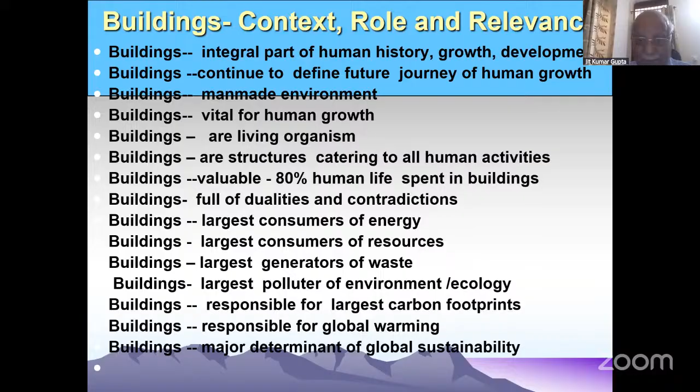So therefore, buildings are relevant, and buildings carry a message for you, that they have to be good and supportive of human living. So if buildings have positivity, buildings also have negativity. The reason is buildings are the largest consumer of energy and resources, and the largest generator of waste. And they are a prime reason for global warming and environmental and ecological damage. So once you know buildings have positivity and they have negativity, that's where we have to ensure buildings are made rational—they are planned and designed in such a manner that they not only help humanity, but also preserve nature and biodiversity.

So buildings have their own connotation, and studies have already shown that a green school makes learning much easier and much more meaningful. A green house makes people happy, healthy, and more productive. A green hospital cares for patients very quickly, and a green shopping mall increases sales. In fact, please understand, sustainable buildings create a win-win situation for the owner, occupant, and user. And the context of the building, you can see, is the human being, because human beings require everything for their education, healthcare, study, stay, and work, etc. So as human numbers increase, the demand for buildings is also growing.

With rapid urbanization, more and more people are opting for cities and migrating to cities where new kinds of buildings are there. So the context of building is going to be relevant, and more and more buildings will be constructed, and the building typology will go on changing.

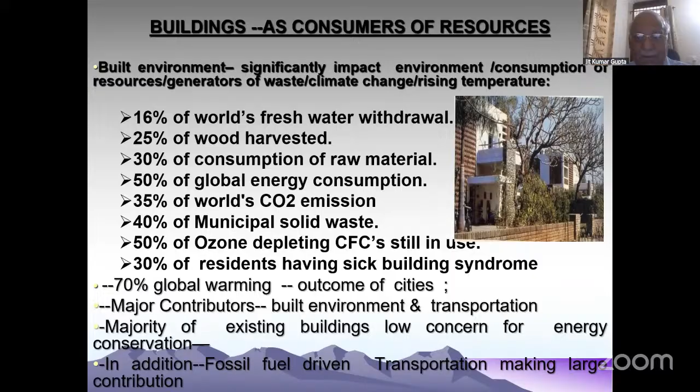So buildings have role and relevance in water, energy, material, waste, carbon, and also in making people happy and healthy. It's important to understand that buildings have to be looked at more attentively, more rationally, so that you do a good job, because the role and responsibility of architects remain very critical.

Because if you design a bad building, that building is going to do great injustice, not only to humanity, but also to the environment.

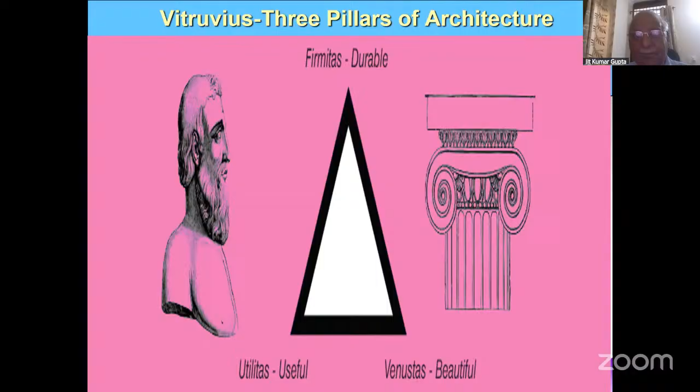Just look at this gentleman, Vitruvius, the father of architecture. He was chief engineer in Rome, and he was the first person to lay down 3 principles for any building. He said a building must comply with 3 things. Number 1, building must be useful. Number 2, building must be safe to live in, and durable. And thirdly, the building must be beautiful - utilitas, firmitas, venustas. These were the three principles enunciated by the father of architecture.

But I found out it is not only these three - beauty, utility, and safety - because building involves cost, quality, and time, you are spending money. And in addition, buildings are not only these six factors, buildings are also consuming resources, and buildings are also impacting biodiversity and environment. So these nine parameters are cost, quality, and time, utility, beauty and durability, plus conservation of resources, biodiversity, and environment.

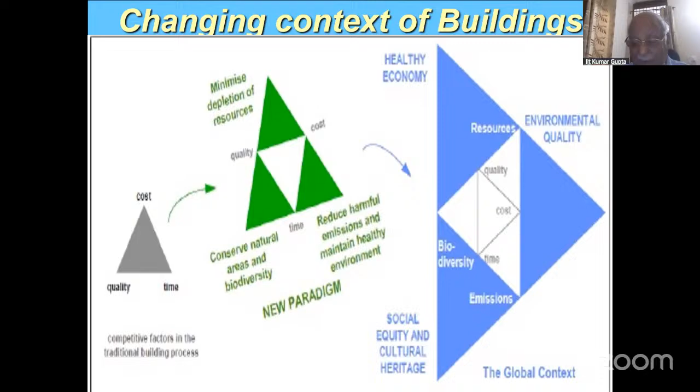Plus, buildings have the local and the global context. Don't think that if you do a wrong building in India, it will only impact locally - it will impact the environment globally. Or if you do a good job, then it is going to positively impact globally. So the buildings are not only having the local context, they have the global context too.

If you dissect the building, a building has 7 layers across its entire life cycle. First, you look at the site, then you get into the design, you construct it. Once the building is constructed, you occupy it, you start operating it, and during operation you maintain it and renovate it. After the building has outlived its life, or you want a new building to come in, you deconstruct the building and then do this again.

All these 7 layers basically involve consumption of energy, water, material, and natural resources all the time. And what does it do in the process? It generates waste, pollutes air, water, and indoor air, creates heat island, and leads to flooding and noise. The cumulative effect of all these factors is harm to human health, environmental degradation, and loss of resources.

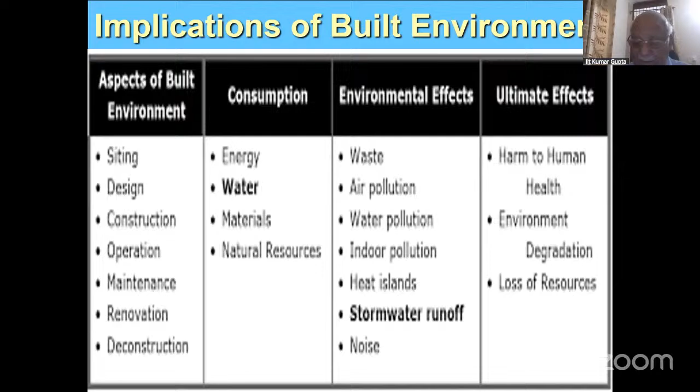So you can see the positivity and negativity of building, and it has been categorically said that buildings have to be looked at very carefully, because buildings are known to generate carbon dioxide to the extent of 10 gigatons. 35% of global carbon dioxide emissions can be attributed to buildings. Water, energy, waste - I mentioned all these. In India, studies by McKinsey Global Institute say India needs 700 to 900 million square meters of built-up space annually.

So we know buildings have impact on human health. They are impacting environment, ecology, and resources itself. So therefore, if we have to remain sustainable, building needs to be looked at critically, differently, distinctly, and we need to appreciate the role and relevance of the building - they need to be planned and designed differently. As professionals, you all know there are options available with us to make buildings more resource-efficient, supportive of the environment, and least consumer of energy and resources.

But what option could be? You approach and look at the building holistically as one unit. So you have an integrated approach to planning and designing the building. Secondly, you have to design your building with response to the climate where the building is located. Another option is to work with nature, because nature provides all kinds of solutions and resources, and the resources provided by nature are all renewable and never exhausting.

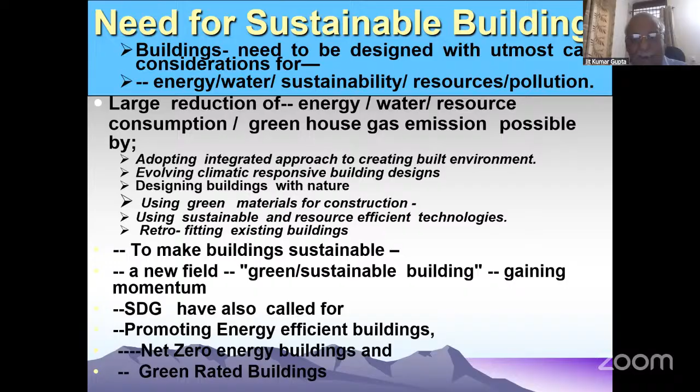So therefore, in order to achieve buildings that consume less resources, water, energy, generate less waste, and provide the best indoor air quality, we have to look at buildings differently and distinctly. We have to plan buildings in a different fashion, and the new typology of building that is coming is green and sustainable building. That's what we are looking at.

And this can happen only... there are two things: cities are consuming 70% of energy and 70% of resources, and this we have to minimize. There are two areas which are consuming major resources and generating waste - number one is the building, and the second is where you are traveling.

So if you make your building sustainable, least consumer of energy and resources, and if you can minimize travel, and shift people traveling from fossil fuel-driven to electrical or other sustainable fuels, you will do a great job.

So after we have done our job, and we look at green buildings as the option, let's understand what green buildings are. When you look at green buildings, please understand there are 5 elements which constitute a green building. Wherever the sustainable building and green building issue comes, these 5 principles will form the underlying foundation for designing this concept.

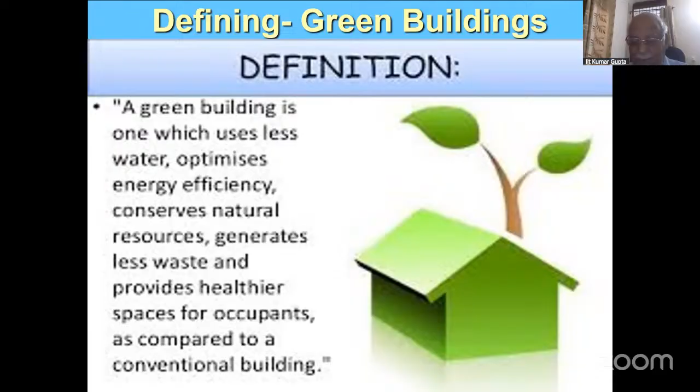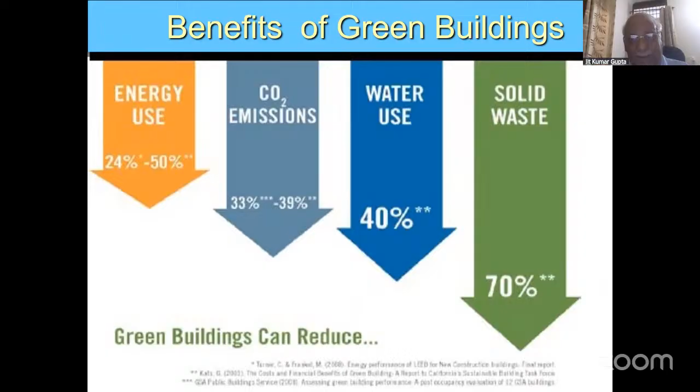So a green building, when you design it on the 5 principles, you will be able to reduce energy consumption up to 50%, water by 40%, carbon emission by one-third, and solid waste by 70%.

Now the benefits of green buildings: since buildings last 60 or 70 years, every day when a building is in operation, it costs money. From the day you start constructing, involving energy, water resources, etc. So if you want the building to be cost effective, with reduced operation costs for water and energy bills, and minimum maintenance costs, then you go for a green building.

In addition to reducing operation cost, green buildings add value because you fetch more rental due to minimum operation cost. You attract multinational companies coming into India, because they first check whether the building is a green building, knowing there's a lot of money involved in electricity and water bills. In addition, it increases the asset value.

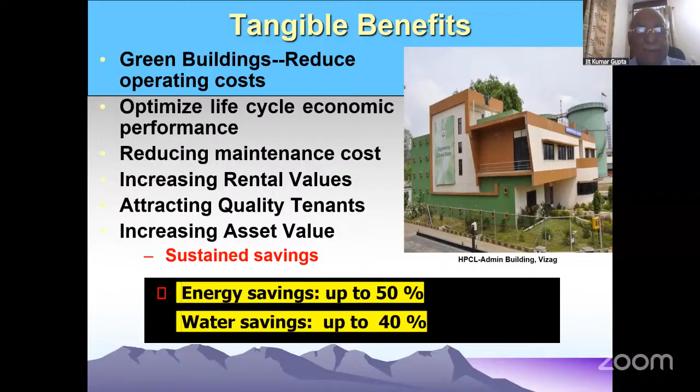In addition to these tangible benefits, there are intangible benefits because you are reducing impact on environment, using less resources, and depending more on natural and renewable sources. So you are not destroying flora and fauna, and you are minimizing impact on environment.

If you give people a healthy environment to live in, they will not fall sick, they will not be absent, and they will be more productive, happy and healthy. Studies have shown that people living in sustainable buildings have higher cognitive scores, over 102, and sleep more than 40 minutes more. They are 8% more productive than others, and contribute to the prosperity and profits of the organizations they work for.

So buildings have implications in terms of reducing energy consumption, water consumption, and carbon emission.

If you design 1 million square feet of green building, you reduce carbon footprint by 8,000 to 12,000 tons every year. Your electricity load goes down by 3 megawatts, and similarly your solid waste is reduced by 70%. So you're reducing water, reducing everything - as they say in cricket, a run saved is a run scored. If you consume less energy, new power plants will not be required.

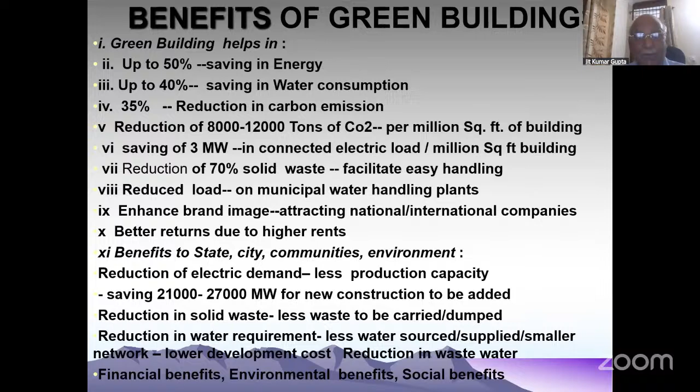Thermal or other energy plants will not be required. If you reduce water requirement by 40%, your water resources will last much longer. If you have less waste, fewer lorries will be required to transport it. So green buildings help not only the environment and society, but also create a win-win situation by generating wealth itself.

But let's look at the cost of the building. Whenever you do a project, always consider two kinds of costs: when designing a building, there is the initial cost, and there is the life cycle cost. Life cycle cost means the duration over which the building is planned, designed, constructed - those 7 layers.

Like our own life cycle - we are born, then children, then we become adults, then elders, and after we finish, we leave this planet Earth. That's our life cycle through these stages. Similarly, a building has those 7 stages and is going to stay here. There are buildings that are 1,000 or 2,000 years old, but normally if you take the life of a building as around 70 to 80 years, you will have to work out two things.

What is the initial cost - that is the short-term cost? And what is the total operation cost? Because buildings are like machines, they consume energy, consume resources, generate waste, and this costs money. So you should do a study in terms of initial cost versus life cycle cost. Initial cost may be higher by 3 or 4%, but you look at the life cycle cost in case you want the building to be sustainable.

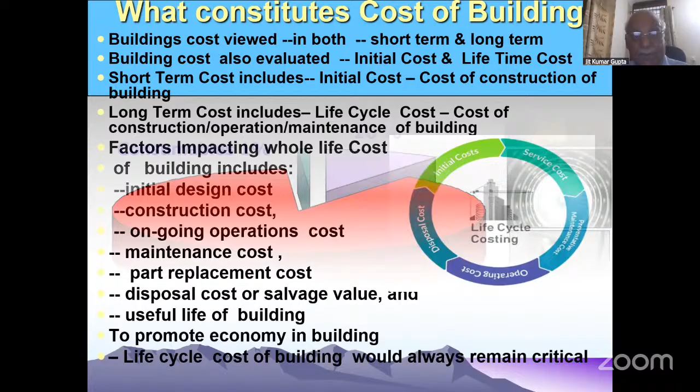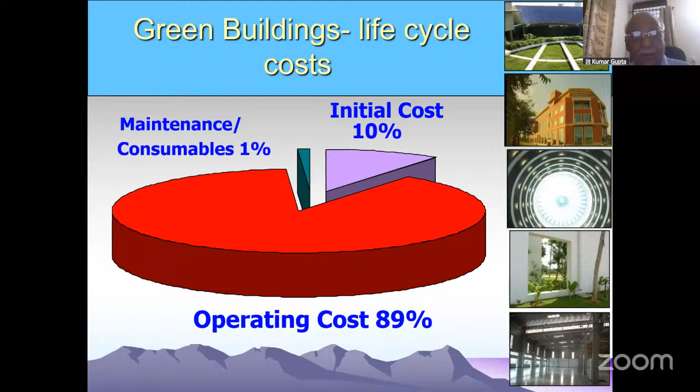Please understand, only 10% of cost is the cost of construction of the building, whereas 90% is the cost of operation and maintenance. So if we are looking only at the initial cost, you are ignoring the operating and maintenance cost. Therefore, both costs will have to be considered, but more emphasis will have to be on how the building behaves, and this is the study which has been made.

The first green building constructed in India was the CII Godrej building. This has a footprint of 20,000 square feet and was constructed in 2003. It was costing 18% more than a normal building, because at that time nobody knew what a green building was. All material was being imported from outside, and it was Mr. Grover who designed this building.

This building was the first platinum rated building to be constructed outside America, because this was a LEED rated building. So over a period of time, studies have been done on this.

Then the ITC Green Centre, which was constructed in 2004, had a 15% additional cost. And the last building, Suzlon One Earth, done in 2010, had a footprint of 800,000 square feet. It was again rated platinum, the highest rating in IGBC, and it costed only 2% more. That 2% cost was recovered in 2 years, and then the building went on saving cost.

So you can see, if somebody questions you that green buildings are very costly - no, please understand, these are the studies which have been made, and this cost is decreasing. Decreasing in the sense because people now know what a green building is. So those elements are embedded during the planning and designing of the building, so the building costs less.

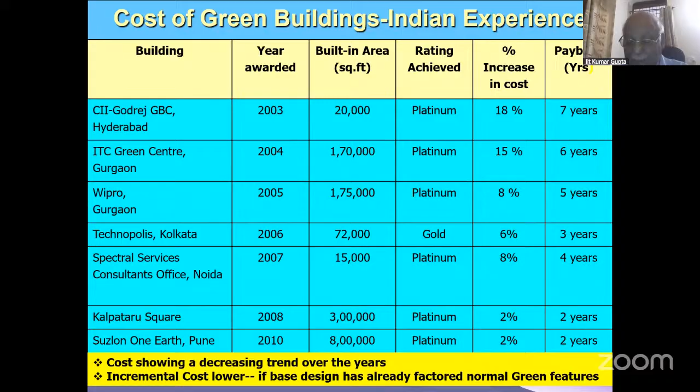This was the first building we talked about - the IGBC headquarters in Hyderabad, which costed 18% more. And this is Suzlon One Earth, constructed in 2010, only 7 years after the first building was constructed, and this costed only 2% more - this is one of the finest buildings.

Over a period of time, the cost of green buildings will be as good as normal buildings, like earlier when you had black and white pictures, colored photographs were very, very expensive. But with technology, colored photographs are now much cheaper compared to black and white. So therefore, ultimately, maybe green buildings may cost less than normal buildings themselves.

Now the question comes, after we have gone through the definition, the context of the building, and the need for a green building, we will see how the building can be designed as a green building. These are things you have already studied. So the first thing you are going to do is adopt an integrated approach to the building - meaning the building is looked at holistically, like a human body, where every point is taken care of.

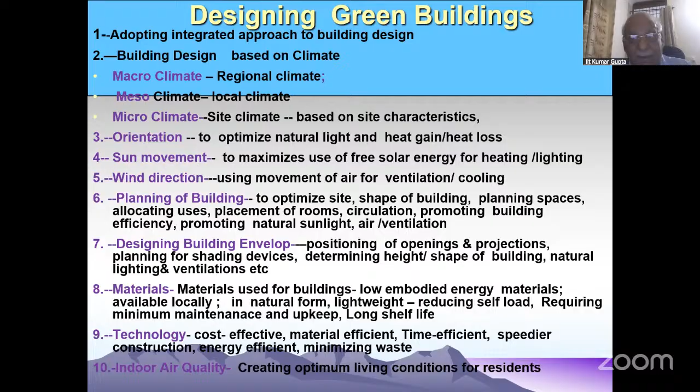And last, but the most important, is what is indoor air quality? That means you have to create optimum living conditions for residents. We are all looking at buildings from outside, but please look from the building inside, because you're spending 80% of your life within the four walls of a building. If the interior air is polluted, surely you are not going to be happy and healthy. You are going to face a lot of problems, and that is what is leading to sick building syndrome. So indoor air quality remains very, very critical.

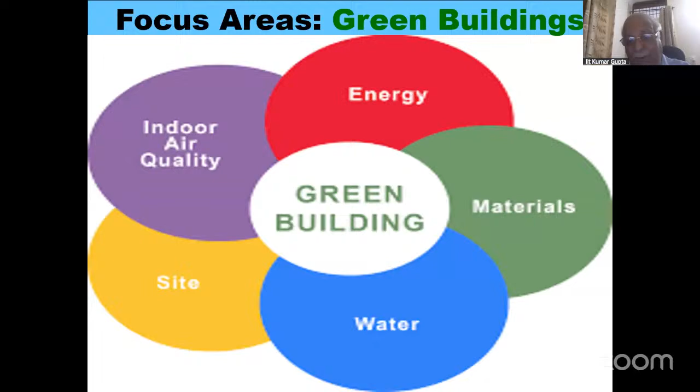So this is the integrated approach. When you are looking at this, you are looking at the site, the energy, water, material, technology, etc, and the climate also - they are all being looked at collectively, and they are all important for reaching a conclusion that the building is a sustainable building.

Second thing to remember is that when you are talking of a green building, don't think green building means you are painting the building with green color. No, green means nature. So all this universe is made of Panchbhuta - we are all made of Panchbhuta, and we will make use of this Panchbhuta in the green building itself. So green building will take care of Prithvi, Agni, Jal, Vayu, and Akash.

And the context is: Prithvi remains your site and site planning, Jal remains your water conservation, Agni is your energy efficiency, Vayu is your indoor air quality, and Akash is daylight, night sky, and pollution.

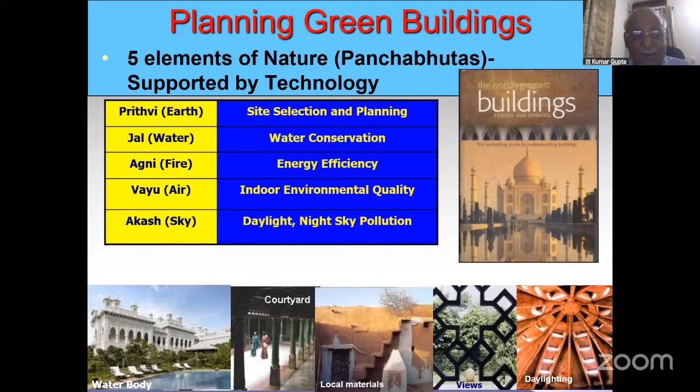If we use these elements of nature as an integral part of planning and designing a building, you may not have the best solution, but you can never ever be wrong. Please understand these are the 5 elements - how best you can make use of that, let's do it. So first we come to the site.

I think in majority of cases where we fault is that we don't look at the design properly. Whenever a design solution is to be given, we immediately look at the requirement. We think of a shape - I will have a circle, a hexagon, a pentagon, intersecting squares, etc. We are premeditating a design. But please understand, if you do your analysis of the site, which is very important, you will find the solution coming from the site - the site gives a message.

So you have to understand the site - where it is located, where is north, south, east, west, which is the wind direction, what is the soil bearing capacity. If you're constructing a very tall, multi-story building, you have to have soil which has that bearing capacity.

Then you have to see the topography - is it level or undulating? Because the message of the building will be there. You will not level the site itself - you will retain the site, respect the site, and see what best you can do.

Then what are the trees and natural features existing - don't try to destroy that. Then hydrology and precipitation - if there's too much rain or too much snowfall, you will have nothing to do but to slant - you have the slanting roof, etc. So you have to make sure that rain and snow are taken care of.

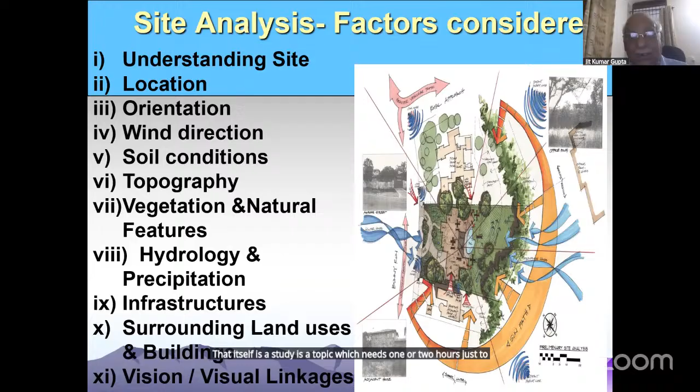So the site study and site selection, that itself is a study, a topic which needs one or two hours just to explain its role and context. After the site is decided—sometimes the site is given and you can't do anything about it—but I think site planning remains important.

In fact, what we do is first design the building and then try to set it within the site itself. No, please understand—your building design should be a response to your site, number one, and the site planning should be done right in the beginning.

So you should decide whether you are going to have one building, or two or three buildings, depending upon your requirement and the nature of your project, and where you are going to place the building. That has to be decided right in the beginning—where the entry is, what is the hard surface, where you are going to do landscaping, which is the public space, and where the building footprints are going to be.

All this has to be done as part of the planning of the site. So please, site planning remains very, very important. When you select and study a site critically and objectively, you will know what typology of building is going to come in, and where the buildings are going to be placed. So I said the principle could be designing with nature, with the neighborhood.

You have to understand the physical character, evaluate the slope. If the site is undulating or contoured, you will go along the contour—you will not go across the contour. And if you have to go across the contour, you do it where minimum cutting and filling will be required.

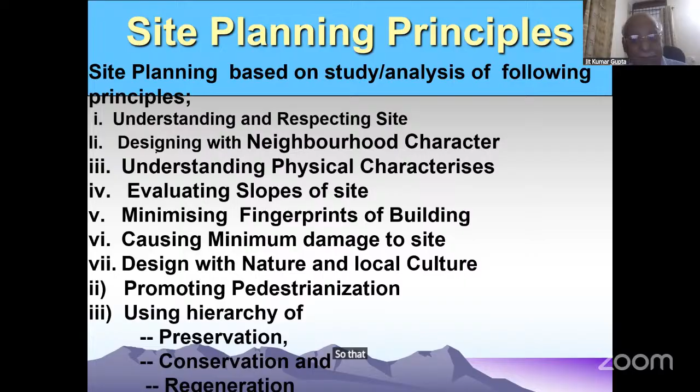And the derelict area—if there is already a built-up area in the site, you don't start digging the new area. You start making use of the area which is already built in, so that you cause minimum damage to the rest of the site. So this is what I'm trying to tell you—try to go along contours wherever you have to do it.

Please make sure you have minimum cutting and filling. This is why you reduce the carbon footprint of the building: if there is nothing constructed, whatever rainwater falls, 50% will infiltrate into the earth, 40% will evaporate, and there will be only 10% runoff. So you will find very little water that gets drained off.

As construction goes on increasing, infiltration goes on reducing, evaporation of water goes on minimizing, but runoff is increasing. If by your construction you cover more than 75% of the building footprint, that surface becomes impervious, and ground recharging will reduce from 50% to 15%. That means you lose 35% of water that would have gone inside, and evaporation drops from 40% to 30%, so you lose another 10% there. What you gain is runoff, which goes from 10% to 55%.

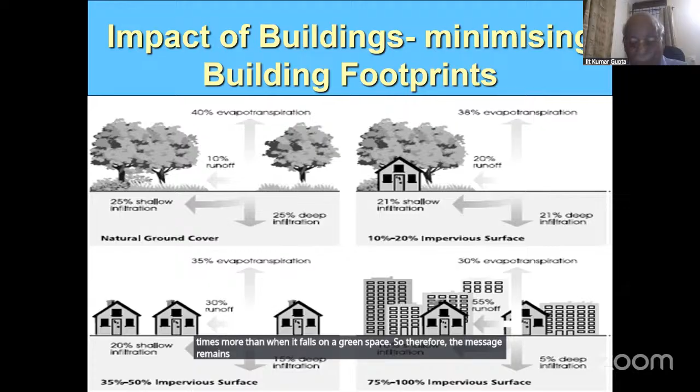Why are cities getting flooded? You've seen cities like Chennai and Hyderabad getting flooded for the simple reason that every inch of land in the city we try to metal over. When you metal it, the water runs off 5.5 times more than when it falls on a green space. So the message remains: please have minimum footprint of the building.

After you have done the site and site planning, now go for the climate, because all buildings will have to be designed in response to climate. Unfortunately, the worst impact of globalization is that it has destroyed localization. Now you find buildings in Shimla that are the same as buildings in the desert of Rajasthan or in coastal areas. Please understand that each climatic zone has its own implications.

India is divided into 5 climatic zones. Number one, hot and dry - that's Rajasthan and Gujarat. Then warm and humid - that's all coastal areas along the Bay of Bengal, Arabian Sea, and Indian Ocean. Then there is a climate that is neither too hot nor too cold - that's temperate. And then there is cold climate - Himachal Pradesh, Uttarakhand, Jammu and Kashmir, and the North Eastern states.

And then you have a composite climate where the climate keeps changing, because you must understand the difference between climate and weather. You design for climate, not for weather, because weather changes every minute, every day. Climate is determined by two major factors: humidity and temperature, observed over 30 years. If one pattern exists for 6 months in a year where temperature remains very high, that's hot and dry.

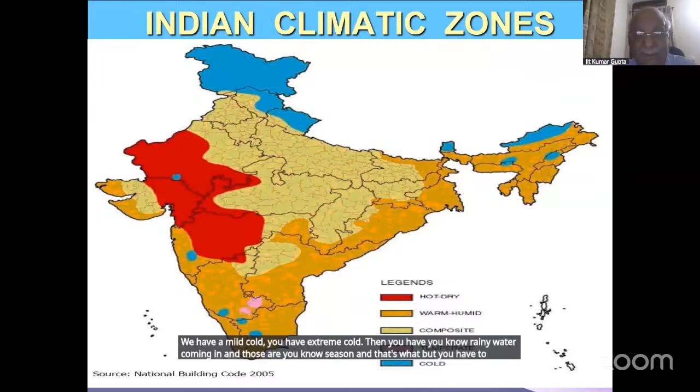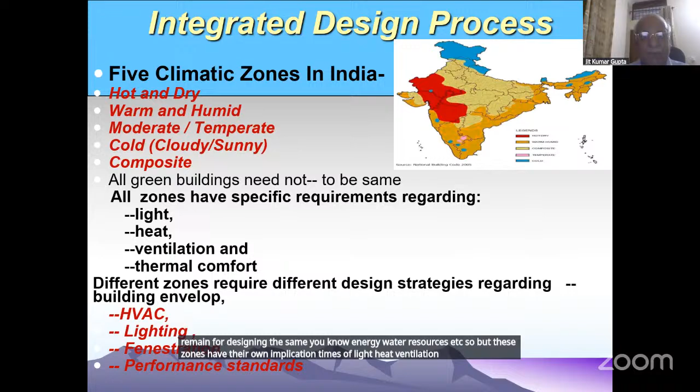That remains a difficult area to design for. Therefore, all buildings will have to be different and distinct, though the principle for designing energy, water, resources, etc. remains the same. These climatic zones have their own implications in terms of light, heat, ventilation, and thermal comfort, so they require different kinds of treatment.

When the temperature is very high in a zone, our first job's principle will be to reduce heat gain in the building. How do you reduce heat gain? Heat is basically gained through the building envelope - that is your roof, outer walls, and their openings. So if you're designing in a hot area, you have to decrease the exposed area.

That means you have to take care about orientation. North is the side where there is no direct sun, so north remains the preferred orientation. Then there's thermal resistance - the building will have to be insulated. The building must also have its own thermal capacity, meaning it should not easily transfer heat inside; that's a massive structure itself.

The heat exchange rate, that air exchange rate, has to be minimized. That means you will have to have smaller windows, etc. Then buffer spaces, though the sun doesn't hit directly on your living area. So air locks, lobby, etc. are there.

Then you are increasing shading, either using projections, using louvers, but you can also use trees, landscape, etc. to shade the hot area.

Then you have to make sure that sun does not get absorbed. So you will have a light color outside so that sun can be reflected. And then wherever the openings are, they are protected, and the glass you put in must have lower solar heat gain coefficient so that you have minimum intake.

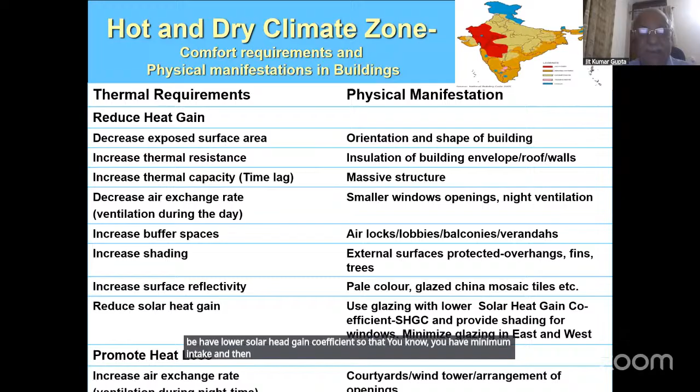And then if the heat is gained, then you make sure the heat is lost immediately. So courtyard was one, cavity walls are other, in case of the cold areas. I'm not going into others because you can think about that, they are similar.

But in case of hot areas, we were reducing heat gain. Now here we are doing it, reducing heat loss. So therefore you have to capture sun. So in hill areas, please never ever place your building on the northern slope, because the northern side never ever has sun. So therefore you have to see that the buildings are only put in south, east, or west, so that you have exposed area and can capture sun.

Number one, you have to have the building thermal resistance so that heat inside has large capacity you build in, and then you have to have colors. The color has to be dark color so that you capture whatever sun is there and you trap the heat.

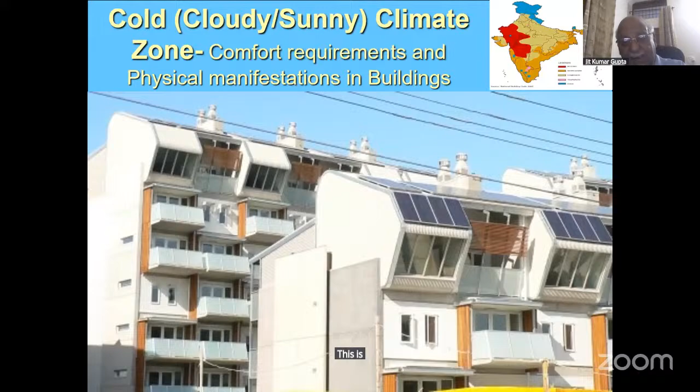So look at Shimla, this is all southern slope. This is all designing in hill area. You have opening on southern slope. You have even the solar panel on the southern slope. You have a trombe wall as an option.

This wall is on the southern side, on the wall you will have a glass. You trap the heat. When the sun hits it, the inner air trapped inside becomes hot and becomes light. You have an entry, one porous entry below and one exit above. So the pressure difference is already there, built in, and the light air moves up, so you can cool it. So trombe wall is one.

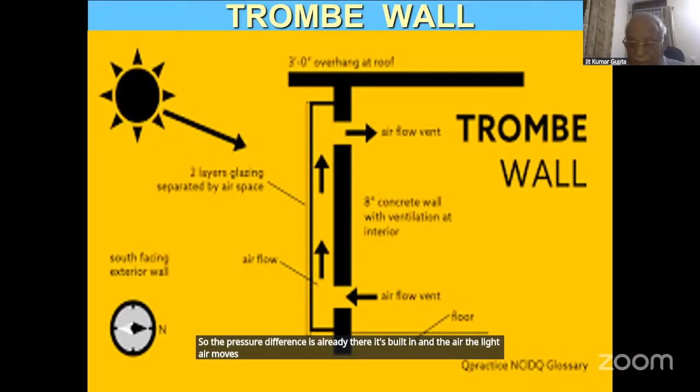This is a solarium which is used there. So number one, this is what when you are dealing with climate.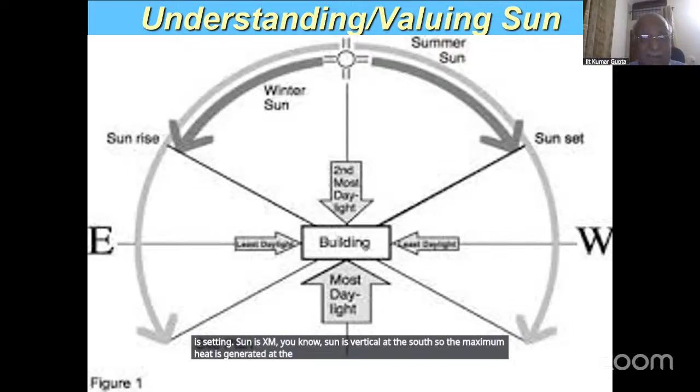In east and west, the sun is always lower, because the sun is rising and the sun is setting. The sun is vertical at the south. So the maximum heat is generated on the southern side, for the reason that the distance between sun and the earth is minimum. It's perpendicular, and this is a vertical sun.

So during the summer, you can cut off the sun by a horizontal projection. In the winter, the sun remains lower. On the south side, you will have the sun coming in the southern window. So therefore, southeast remains one of the best options in this.

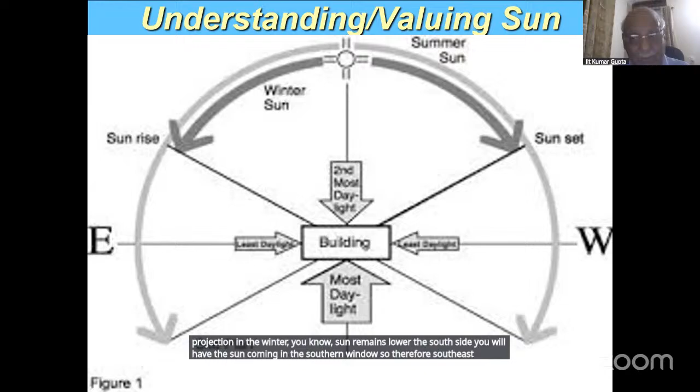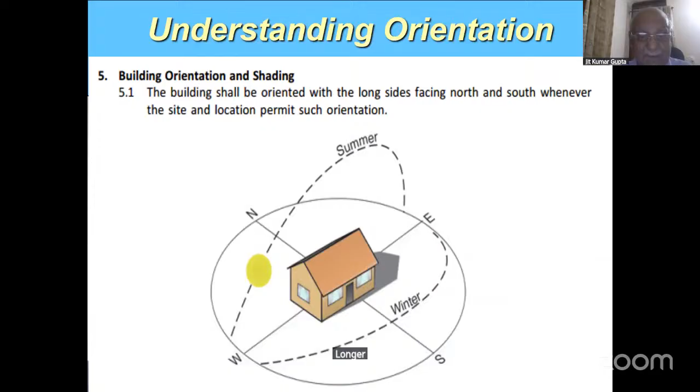So ultimately, orientation remains very, very important, and you have to see how you are placing the building, how you are designing the building, how you are putting the opening itself. In our case, in the hot area, the building's longer side shall be facing north and south, and the shorter side will be east and west.

And if you ever have an opportunity to visit Chandigarh, in the capital complex, there is a Tower of Shadows, which tells you how the sun is to be managed. And this climate can be studied only by one building.

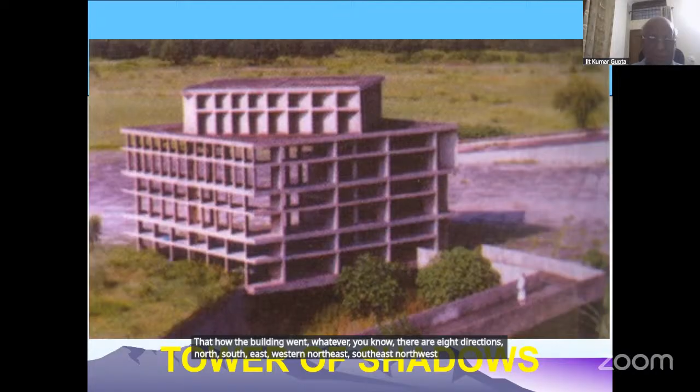This one was done by Corbusier in order to make you understand how the building should be placed. There are 8 directions: north, south, east, west, and northeast, southeast, northwest, and southwest. If your building faces north, you don't have to put anything because there is never a sun.

For east and west, you will need a louver, and for the southern side, you will have a projection, which you can do by designing. Southeast is a good side, but west is the worst one.

So you can have your best living conditions on the south and southeast sides, and in the house your living room, bedroom, and kitchen can be there. But on the western side, you can have your parking, storage, etc.

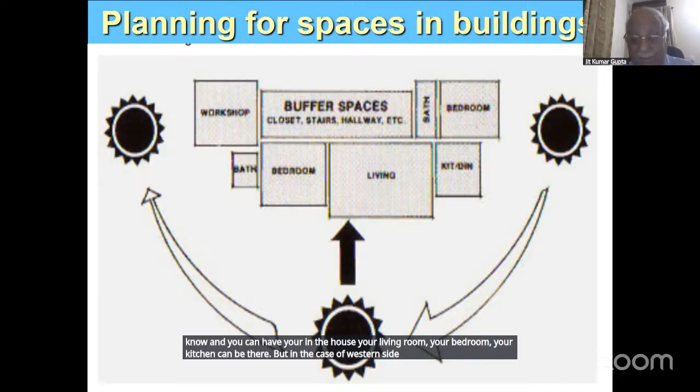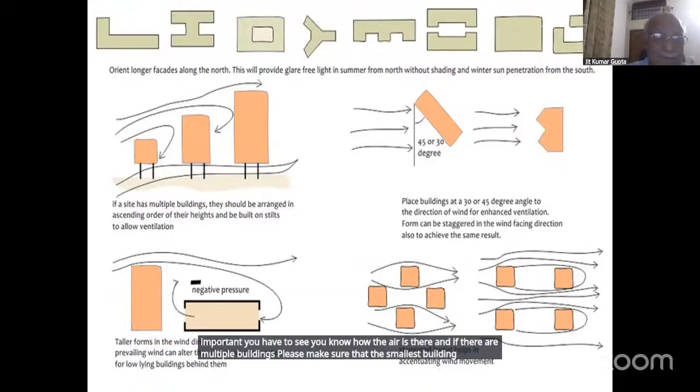Air movement remains very important. You have to see how the air flows. And if there are multiple buildings, make sure that the smallest building is placed in front of the air, so that all other buildings have accessibility to it.

If you have a tall building right in front and smaller buildings at the back, you will lose the benefit of airflow. So instead of a 90-degree angle, if you do 30 or 45 degrees, you will have more advantage. If there are a number of blocks, don't put them in a straight line; they have to be staggered to make use of this.

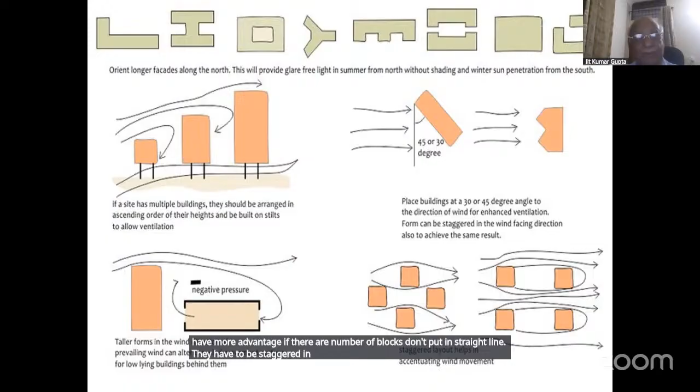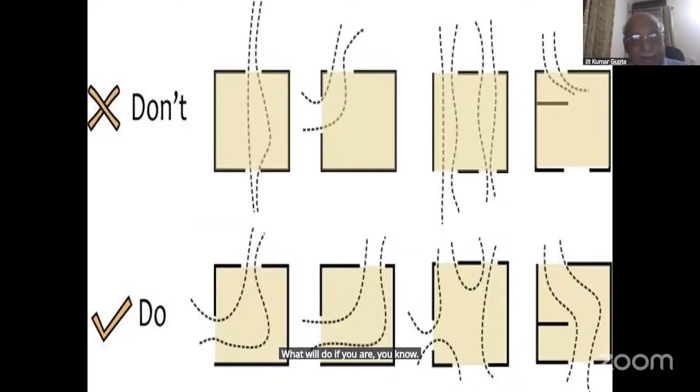Energy remains very important. Let me tell you, energy will remain relevant because we are all consumers of energy, and all human growth and development is linked to energy. So therefore, we will be using energy more and more.

When we talk of buildings, number one, we have to reduce energy consumption. Number two, we have to shift from black energy to green energy. So we will have energy-efficient buildings, zero energy buildings, and energy-positive buildings. That doesn't mean the building will not consume energy; it will go on consuming energy, but you have to make sure through equipment and design how you can minimize it.

When you look at a building, it consumes energy in three parts. One is embodied energy - the energy that goes into making a building, since you use materials, equipment, and bring things from outside, all of which consume energy. Then during maintenance and upkeep, you have to make changes, which also involves energy. And of course, your heating, ventilation, and air conditioning always consume energy.

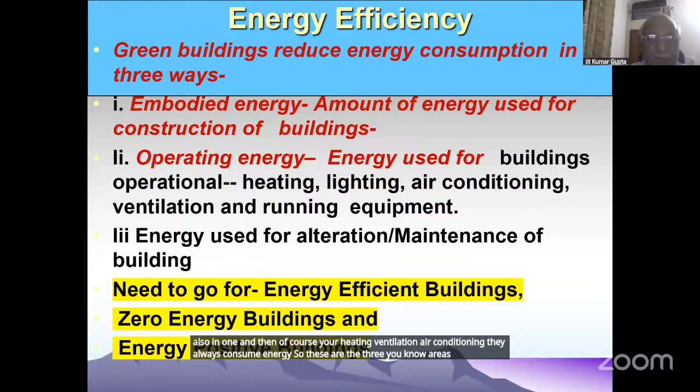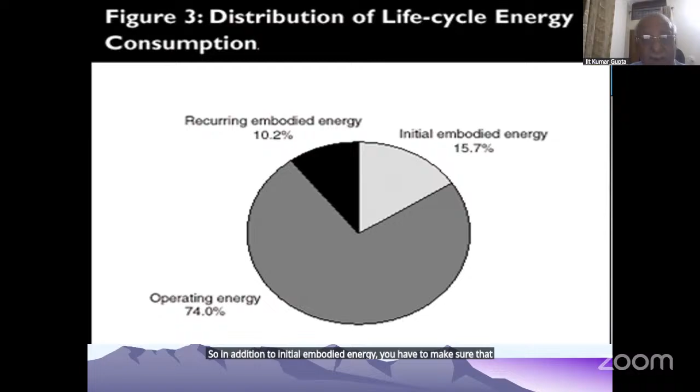So you can see 16% is the initial embodied energy, 10% is the recurring energy, but 74% is the operating energy. So in addition to initial embodied energy, you have to make sure the operating energy remains very low. For embodied energy, you should use materials that are local and in natural form, with lesser energy in their production, and procure material from close vicinity rather than from a distance, since transport will increase the embodied energy.

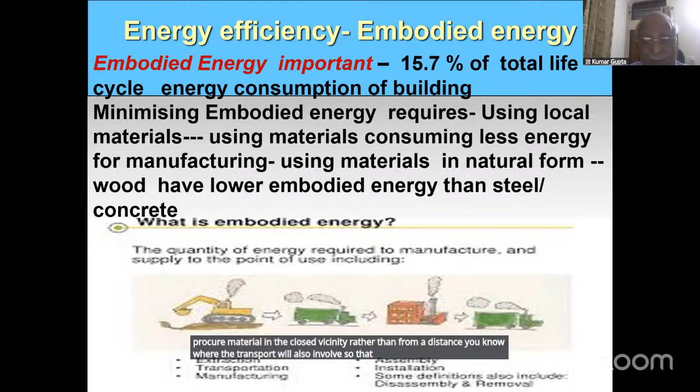So secondly, what we are trying to do is look at the way we are designing, since the sun remains the best source of light and heating. You are going to make use of this through design.

So your orientation will come accordingly. You'll use the material like a brick, but please don't plaster it. The moment you plaster the brick, you will have to paint it, and every 3 years the paint will go away. So if materials are used in their natural form, if they're local materials, things will be much better.

And then the building has the capacity to generate its own resources. That's what we see here.

So how can you minimize energy use? That means you design the building to respond to climate. That is your passive architecture design coming into being. You will have an efficient building envelope, optimizing the use of daylight, and you will orient the building for the best placement. That means minimum use of mechanical heating and cooling.

Second, whatever equipment you use for lighting, fans, air conditioning, laptops, etc., please make sure they are all starred so that they consume lesser energy.

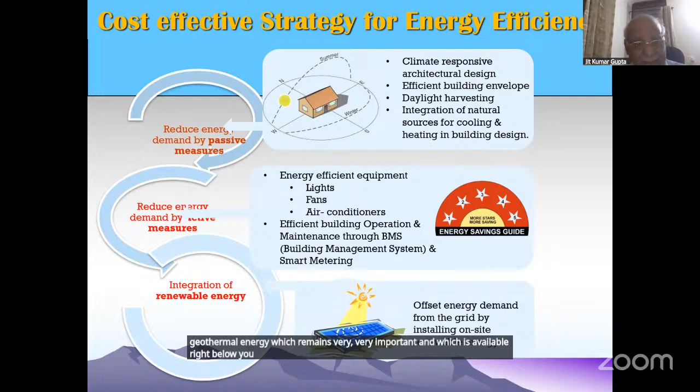And of course, the building should generate its own energy, like photovoltaic cells, wind turbines, etc. We have not explored geothermal energy, which remains very important and is available right below you. Let technology work on this, and we'll do more justice to it.

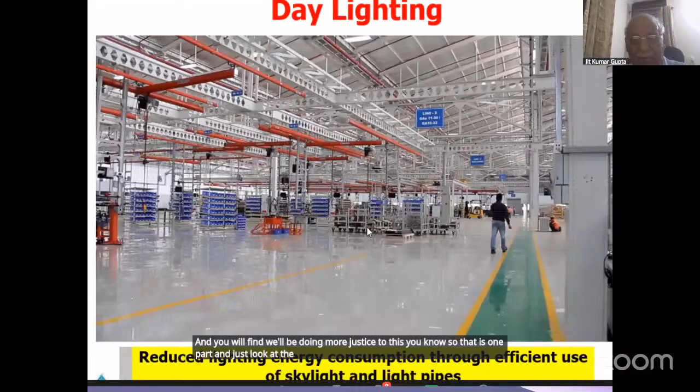So that is one part. Just look at this building with north light - you don't see any artificial light in there. You can even harvest sunlight for lighting the basement, where there is normally a problem.

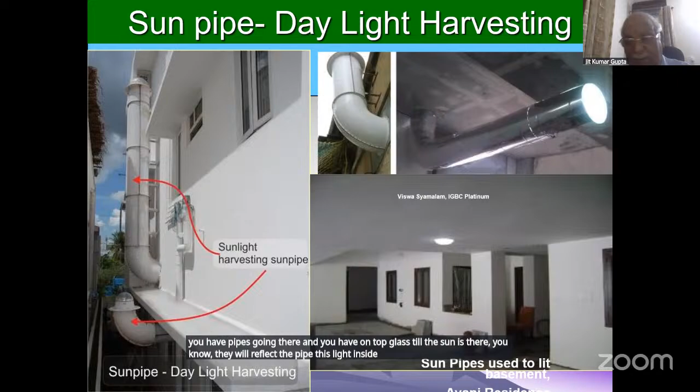So you have pipes going down, and a glass top to capture the sun. They reflect the light through the pipe inside, and these are actual pictures of a basement where there is no artificial light.

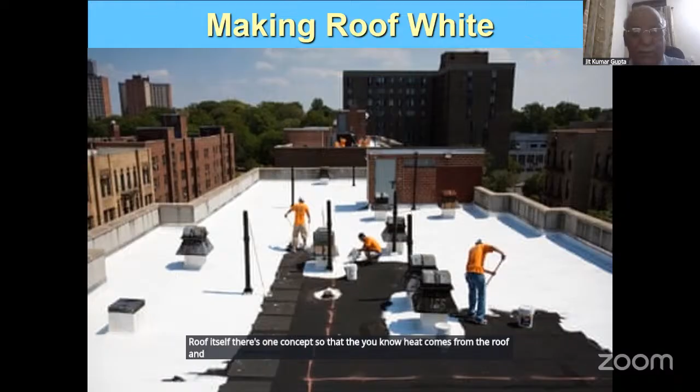If you want to reduce electricity consumption, you have to make sure the building does not gain heat. So you can have a white roof - the concept is that heat comes from the roof and from the walls, etc. A white roof reflects the heat.

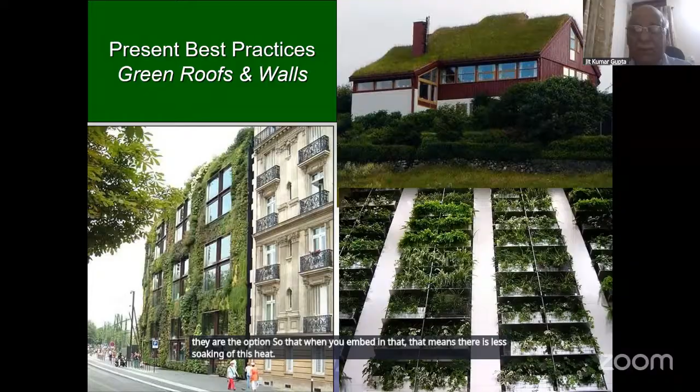You can have a green roof so minimum absorption of heat takes place. You can have green walls as an option. So when you embed these, there is less soaking of heat, and when there is less soaking of heat, you require lesser energy.

Then we look at water. Water remains very, very important. Let me tell you clearly: India has only 4% of the world's water, 17.7% of the population, and 550 million animals - the largest animal population. So we require water, but only 4% is with us.

And two parts of that water are frozen in the Himalayas, and we can't access it. So water has to be valued, and water needs to be looked into carefully.

In this case, I would like to add another point: please don't treat land as a commodity, because India has only 2.4% of the world's land and 17.7% of the population. So India is the most land-stressed country in the world. We don't have land itself.

Land is needed - all development, all buildings, schools, education, transportation, this will happen on land itself. And you have to feed people, and all food has to come from the land. So what is it - 2.4% of land and 17.7% of population - how does this equation work? Is there any mathematics where 2.4 equals 17.7?

The only option available is how we can use the land - you can use the land 24 by 7, 365 days, using the same land 2 times, 3 times. Like your college - if there are 100 people in morning classes and the same in evening classes, the infrastructure is used double the time.

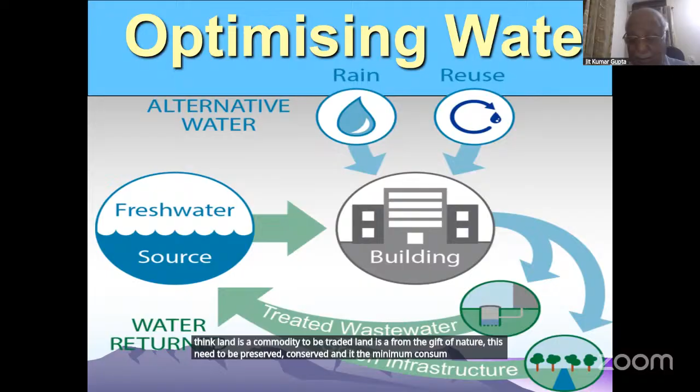So in the case of water, it is about refusal - where you don't need water, you will not use the water.

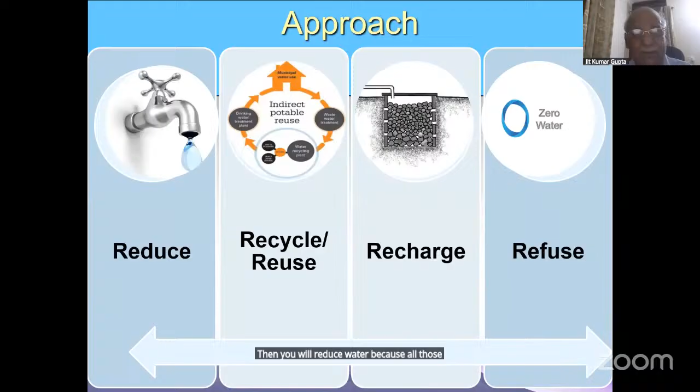You will reduce water because all that equipment required will minimize water use, and the water will have to be used multiple times - recycle, reuse, and then recharge. Rainwater harvesting could be there. So these are the options available.

If you go to Singapore, they will serve you new water. What is new water? That is sewerage water which is treated, then bottled and made available. People are drinking it because it's an island, they don't have water. They were importing water from Malaysia. But the technology is so good, their systems are so perfect.

The water which is WC water is black water. Whatever water is supplied to you, only 20% is used for your drinking, cooking, etc. The rest 80% is just thrown out, and the water thrown out is of two kinds, black water and gray water. Black water comes from the WC, whereas gray water comes from bathing, kitchen, etc.

Those don't have impurities much, so they can be used for flushing, etc. This is what is very important - wherever the water is, you can put aerators on that to mix the air. Rainwater harvesting remains one of the best options, and we are looking at waterless urinals and waterless WCs. All these faucets, they are all aerators.

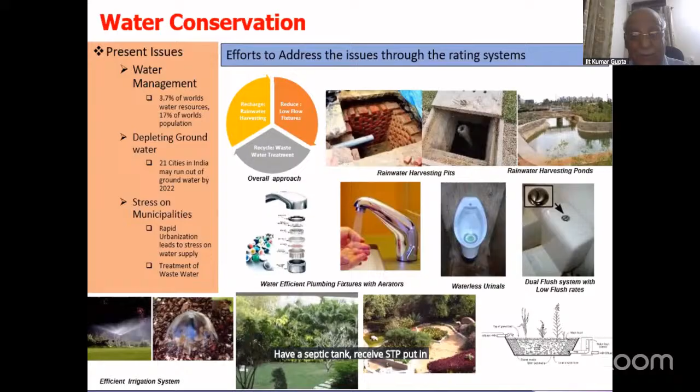There is phytoremediation, another method. You don't need a WC - you have plants, and you put this WC water there. All this sludge is digested and you get fresh water. You don't have to have a septic tank or an STP put in. So by phytoremediation, you can treat even the black water as water.

Considering this, they had just two ponds created, so all the rainwater coming was getting collected in these ponds. This, in micro, changes the microclimate, it reduces the harshness, and of course the buildings are reflected through this. So Corbusier made rainwater harvesting an integral part of the design.

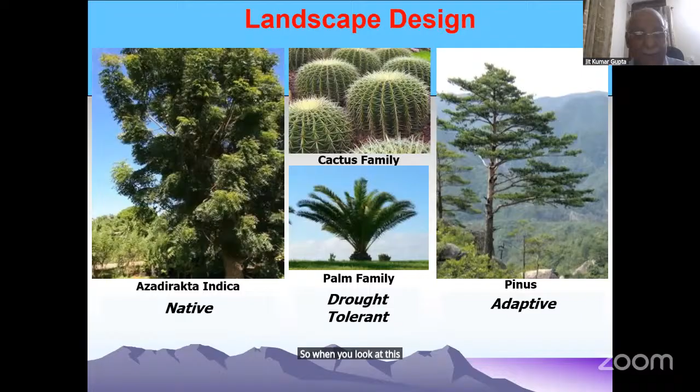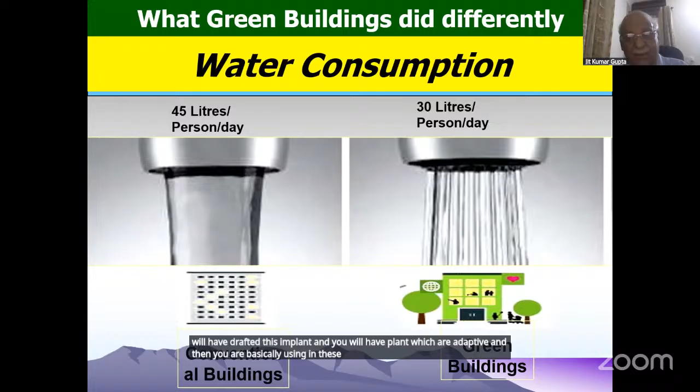This is a high court which has followed the same principle. When you look at these plants, you will have native plants, drought resistant plants, and plants which are adaptive. In these big green buildings, there are aerators which reduce water from 45 liters to 30 liters, and WCs use 6 and 3 liters.

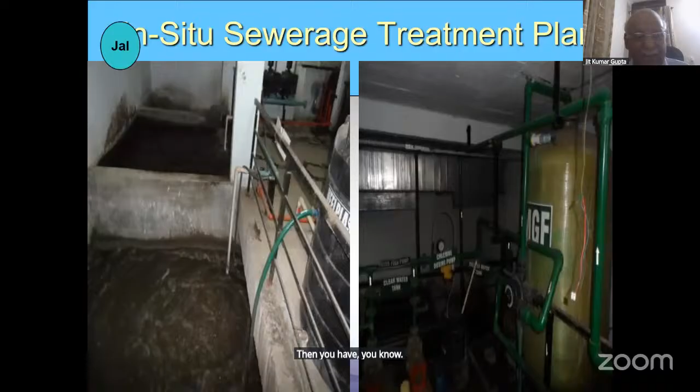You have recycling done in the major areas, and metering is also done. Please understand, water is the elixir of life. So therefore we need to work, and we should also see that the urban water which we generate, if we can use it for agriculture, because agriculture uses 70% of the fresh water from the earth itself.

Those vegetable products are produced in such varieties that they consume minimum water. We are basically consuming double the water the Chinese are using for the same amount of vegetation, and the same kind of wheat or rice which is being produced.

So these are the ways how you can minimize water use. Building material remains very, very important. What you should do - first thing is, don't go for new material. Please understand that if you look at cities, construction and demolition waste constitutes 40% of the total municipal waste, and this waste never degrades. Earlier we were using the low-lying areas and reclaiming that.

Now what is done is that construction and demolition waste is being collected, and this is being recycled, and they can be used for making new material.

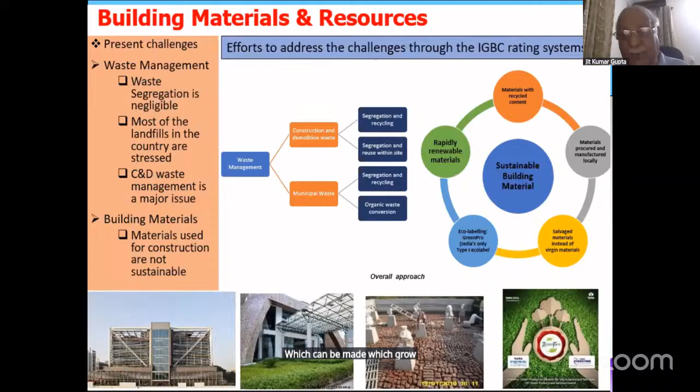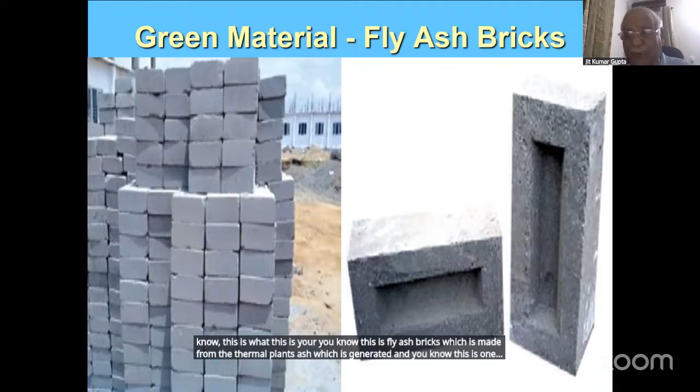This is fly ash bricks, made from the ash generated from thermal plants. This does not require any firing, so it is very environment friendly. It has less embodied energy, very good thermal properties. There is no question of efflorescence, and no fire risk because it's already burnt.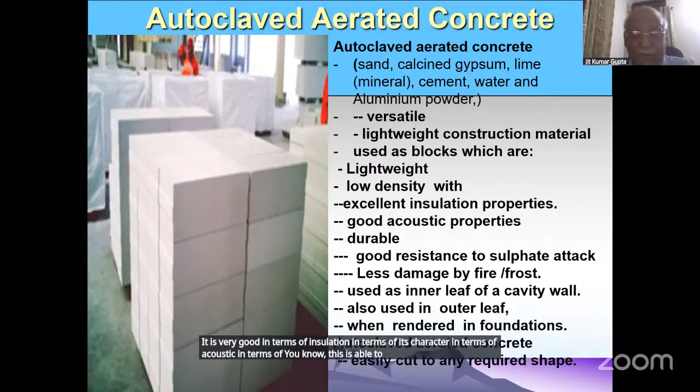Then autoclaved aerated concrete is another material which is very lightweight, very good in terms of insulation, in terms of its character, in terms of acoustics, and able to withstand the pressure of an earthquake because it's very lightweight itself.

UPVC windows have the advantage that they are expensive, of course, but they make the building insulated, etc.

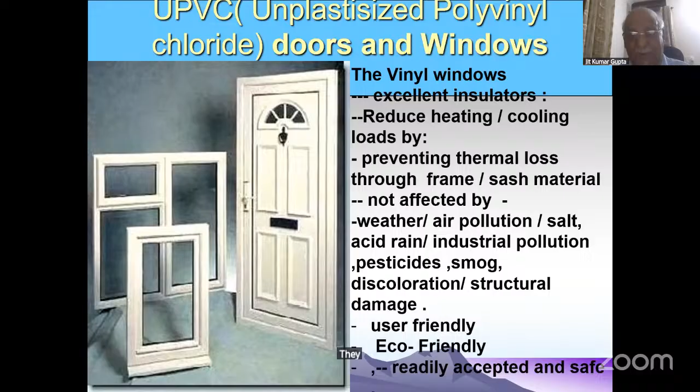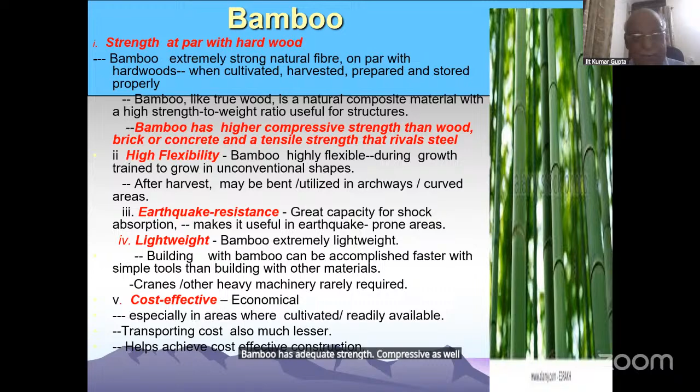Bamboo is the steel of the 21st century. Now research is going on how you can use bamboo instead of steel itself. Bamboo has adequate strength, compressive as well as tensile. It is earthquake resistant, lightweight, cost effective, durable, fast growing, and simple in designing. It can replace wood, it can absorb carbon dioxide, and you can do a lot of manipulation with it and it improves indoor air quality.

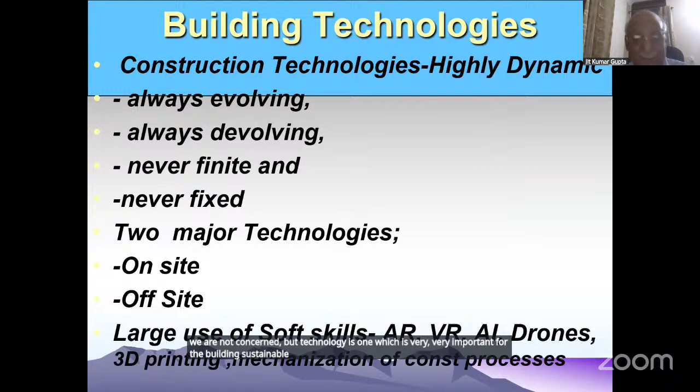Technology remains very, very important. Of course technology is one thing which is very important for the building's sustainability. And because these technologies are changing very fast, there are two main technologies: one is on-site construction, the other is off-site construction.

So buildings are being manufactured. The off-site construction has a distinct advantage in reducing cost and making the building cost effective, with material efficiency. A building which will take one year to build can be done in one month, because the majority of products are manufactured in the industry and transported, and you only need foundation and a few walls. This is very important in terms of safety, time, and there is no wastage.

You don't have to have people bring material every day because they are not required. You don't even need to water it. So the first building done on this prefabrication was the Crystal Palace.

India now has a system. They brought in 6 technologies which are green. These are the lighthouse projects, houses which will be constructed and were done within 1 year, using the best technologies available.

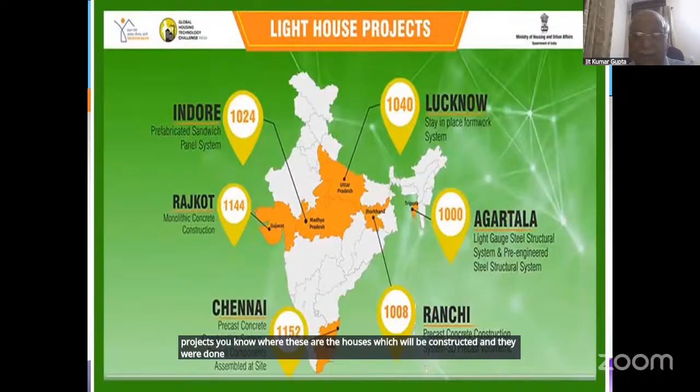Indoor air quality remains very important. I said outside because indoor air quality is sometimes 70 times more polluted, and you are spending 90% of your time indoors.

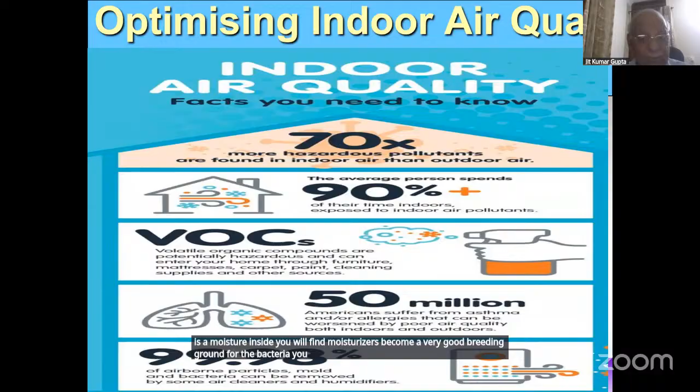And if there is moisture inside, you will find it has become a very good breeding ground for bacteria, and they keep mixing in there, and we inhale it and become sick. So indoor air quality is one of the most essential parts of the building itself. When you are designing a building, please make sure indoor air quality remains very important, otherwise it will lead to tiredness, poor concentration, and illness.

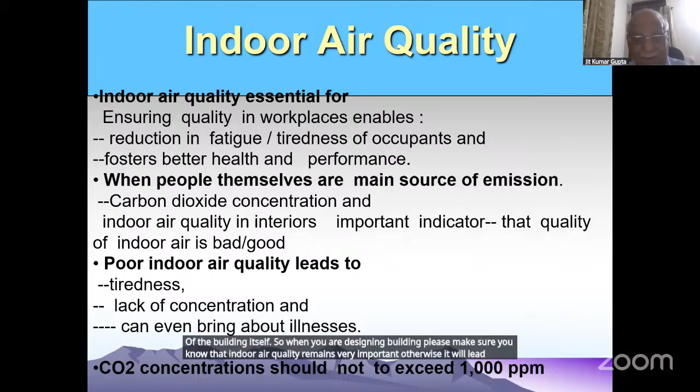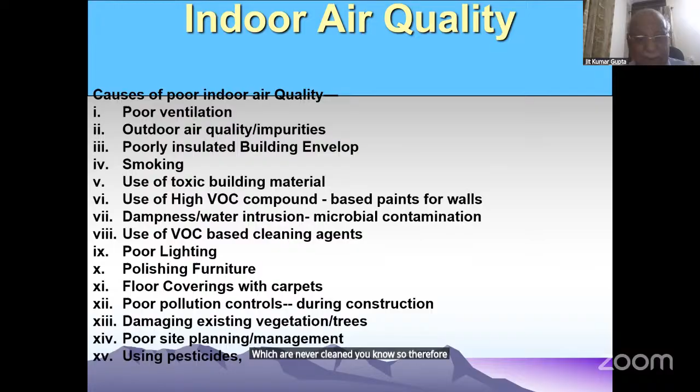The CO2 concentration should not exceed 1,000 ppm. So the problem remains poor ventilation, ceiling of the building. If somebody is smoking, and you are using material inside which is toxic, and lighting is not there, you have furniture, carpets which are never cleaned, so therefore there's noise, and then you damage vegetation, etc.

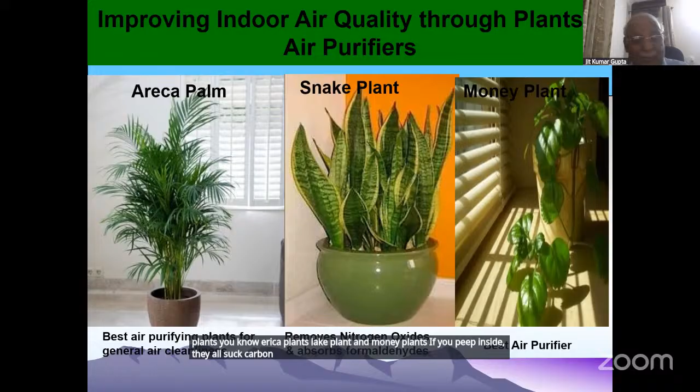So therefore, I think these have to be looked into, both outside and inside. You have to bring fresh air, you have to bring natural light, you have to acoustically seal the building. You have to make sure indoor climate remains comfortable, temperature doesn't rise, and building material used is sustainable. You can even use plants like areca plant, snake plant, and money plant. If you keep them inside, they suck carbon dioxide and release oxygen, so they improve the quality of air.

People say that multi-story buildings remain more inefficient. This is a building which is 71 stories, and it is a zero energy building. What the architect did was divide the building into three parts, and within that there are cavities, which you can see on the right side, and he put turbines there. So when the air was striking, those turbines were moving, and this building generates electricity 24 by 7, 365 days. There's also photovoltaic cells and other things. This building remains a zero energy building.

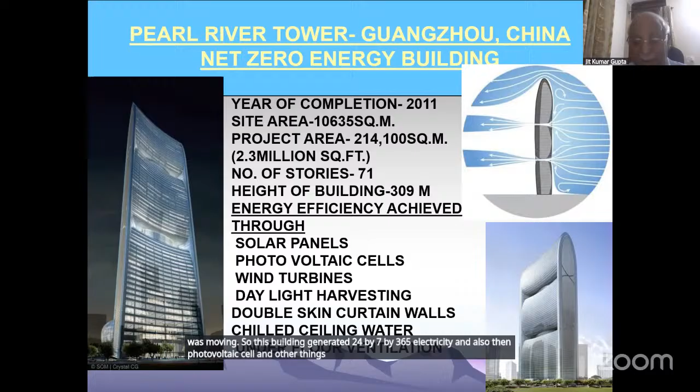So these are the total things which we have said about how buildings are planned and designed. And when you say a building is green, naturally everybody says my green building is a green building. So as in a class, somebody says everybody is brilliant, but who is first, who is second, who is first class, who is second class — you always rate it.

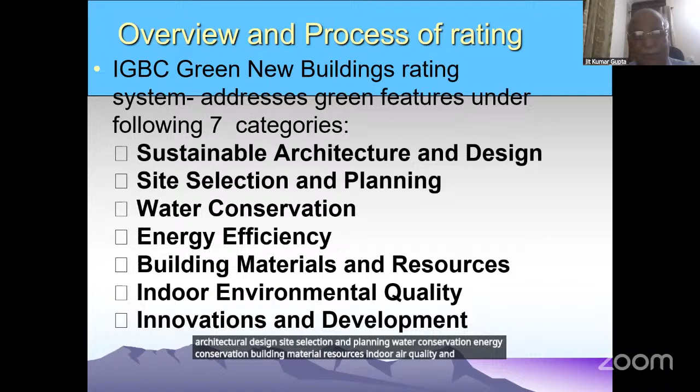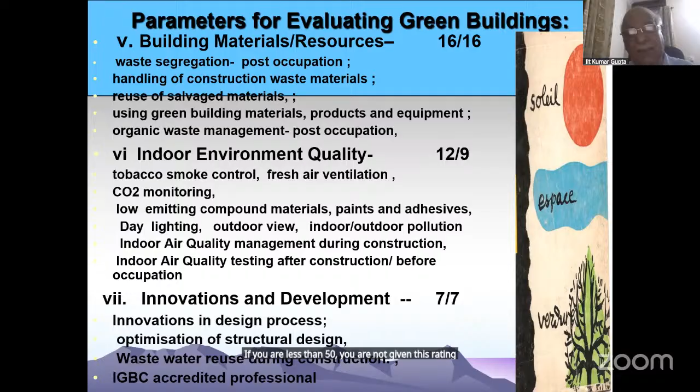The rating is done based on marks. There are 7 parameters on which the building is rated: sustainable architecture and design, site selection and planning, water conservation, energy conservation, building material and resources, indoor air quality, and innovation. The maximum marks are for energy, water, material, etc. Based on that, there are 52 criteria on which the building is evaluated, and based on the score you are given, you are rated — if you are less than 50, you are not given this rating. Then you are given silver, gold, and platinum remains the highest.

So let me conclude. I'm sorry I've taken much of your time, but what I'm trying to communicate is that buildings are very, very important. As professionals, we will always be involved in doing buildings, so we have to be very careful. We should not consider a building as made of brick and mortar — no, buildings are living entities. They are impacting human living, and they are impacting climate and ecology itself.

So therefore, if this world is to be sustainable, if human beings have to be more healthy, I think we have no other option but to design for sustainable buildings. This is what I'm trying to communicate with you. Please look at buildings more differently and distinctly. Make buildings green, using the Panch Bhuta as a way of life, as an integral part of your academic and professional learning. And I'm sure we can all do this. This is all what we expect from you, and we hope so.

Let me conclude: a green building makes you happy and healthy. It provides the highest quality of indoor environment, provides safety and security, optimizes resources, reduces waste, minimizes carbon footprint, makes building operations simple, technology-driven, cost-effective, and energy efficient. Green building makes business sense and creates a win-win situation for owner, tenant, occupant, community, place, and environment.